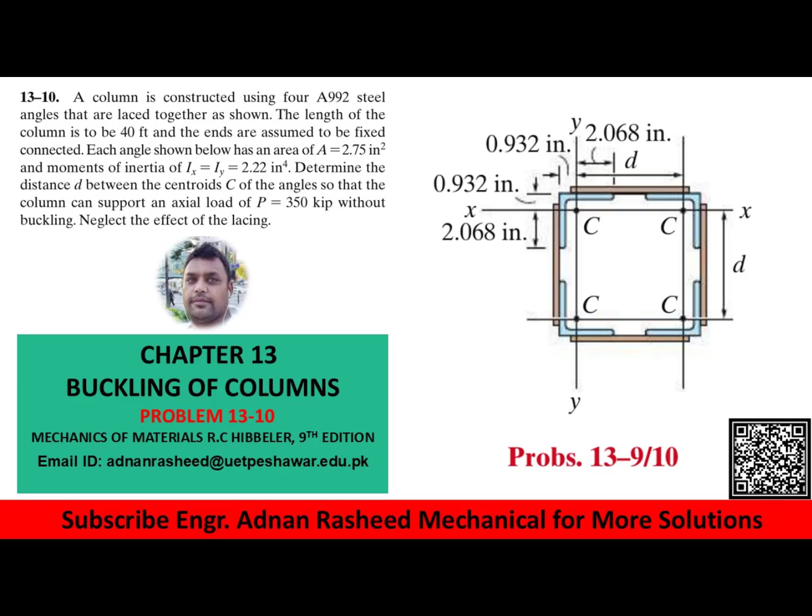Welcome back. In this video, we are going to solve problem 13-10 from chapter 13, Buckling of Columns, from the book Mechanics of Materials by R.C. Hibbeler, 9th edition. The statement is: a column is constructed using four A992 steel angles that are laced together as shown.

The length of the column is 40 feet and the ends are assumed to be fixed connected. Each angle shown has an area of 2.75 square inches and moment of inertia Ix, Iy of 2.22 inch^4. Determine the distance d between the centroid C of the angles so that the column can support an axial load of 350 kips without buckling. Neglect the effect of lacing.

So these are the four angles that are laced together, and these are the lacings. The moment of inertia of each angle about its centroid, Ix and Iy, is given as 2.22, which are the same, with area 2.75 square inches. The column is assumed to be fixed connected. So you have to find this distance d between the centroids of these two angles. Let's start with the solution.

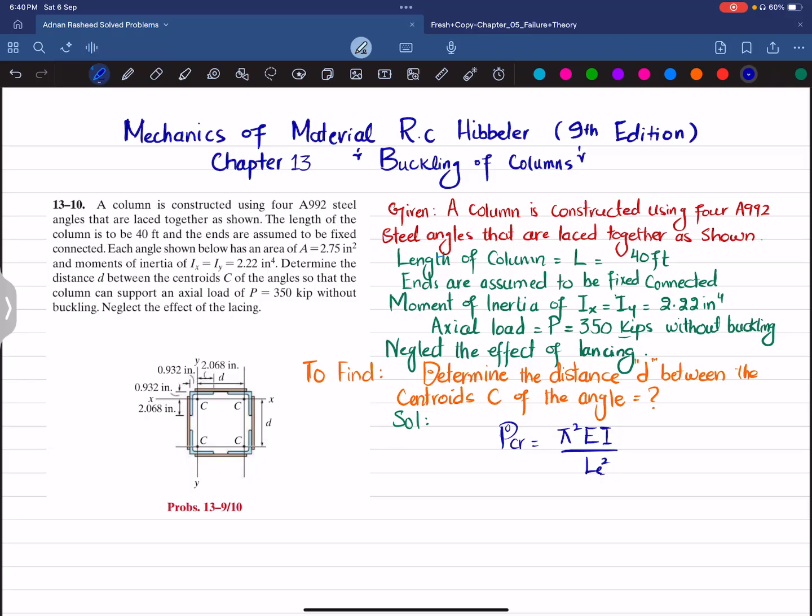What we are doing is using the fact that critical load equals pi squared EI divided by L squared. Critical load is the largest load, the largest load without buckling of the column. So this is equal to pi squared EI over LE squared. This is what we call the Euler formula.

Euler's formula is valid; we can apply this formula only when the critical stress is less than the yield stress. So how do we find critical stress? Critical stress equals critical load over area, and that should be less than yield stress.

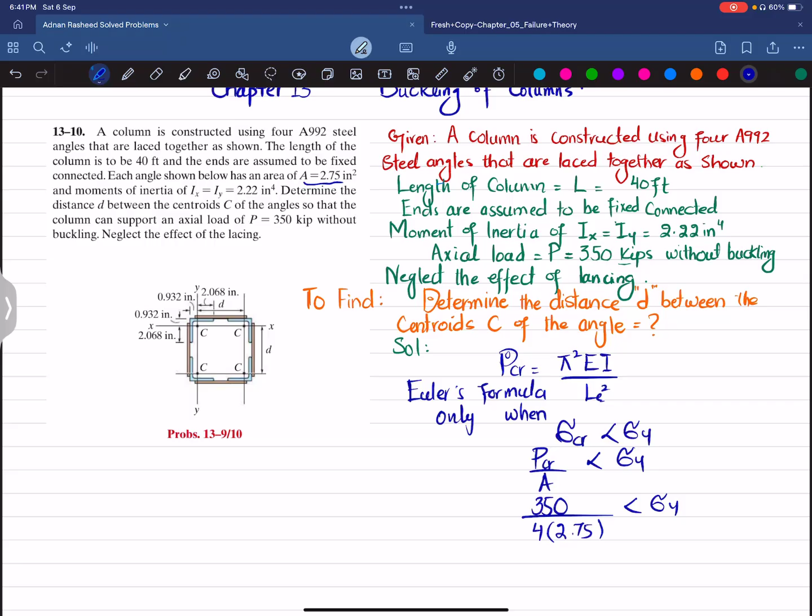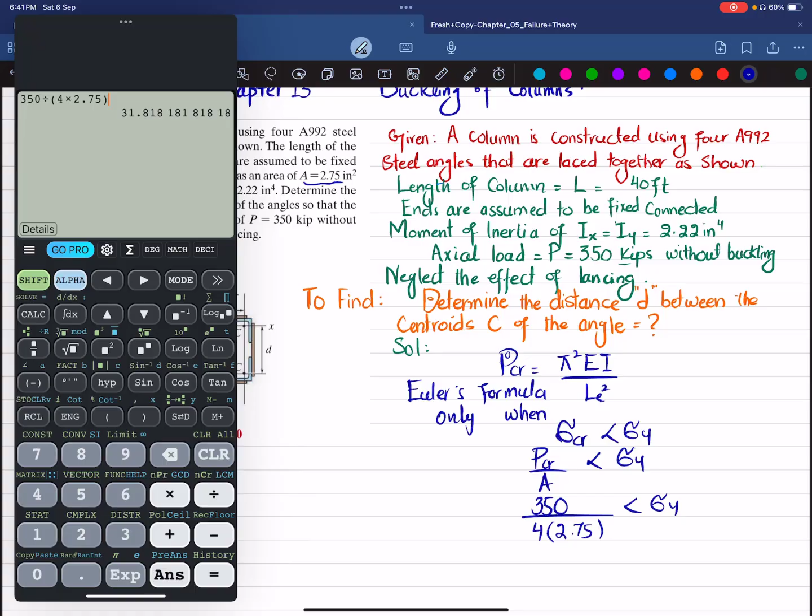Critical load, 350 kips without buckling, is given. So 350 divided by area. There are four angles, so 4 multiplied by the area of each angle, which is 2.75 square inches, should be less than yield stress. So 350 divided by 4 multiplied by 2.75 gives 31.81 KSI, and this should be less than the yield stress.

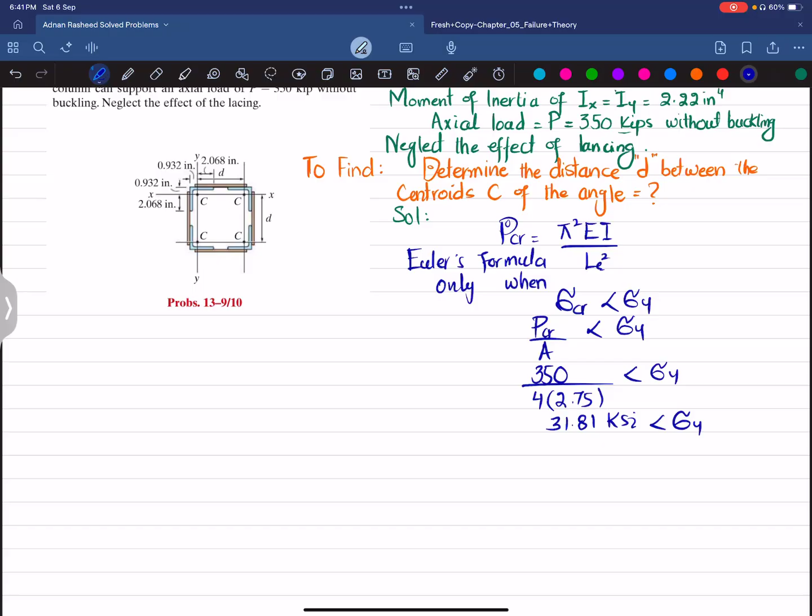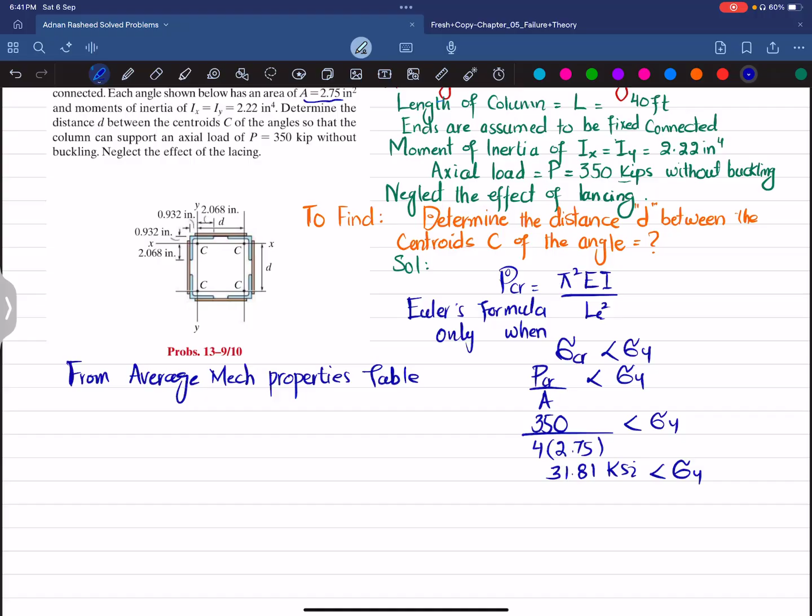So what is the yield stress for A992? We will go to the property table, the average mechanical properties table at the end of the appendix, where we will get sigma yield and also the modulus of elasticity. You have to go to the end of the book, the average mechanical properties table, and look for A992 steel, which has a yield stress of 50 KSI and modulus of elasticity of 29 times 10 raised to power 3 KSI.

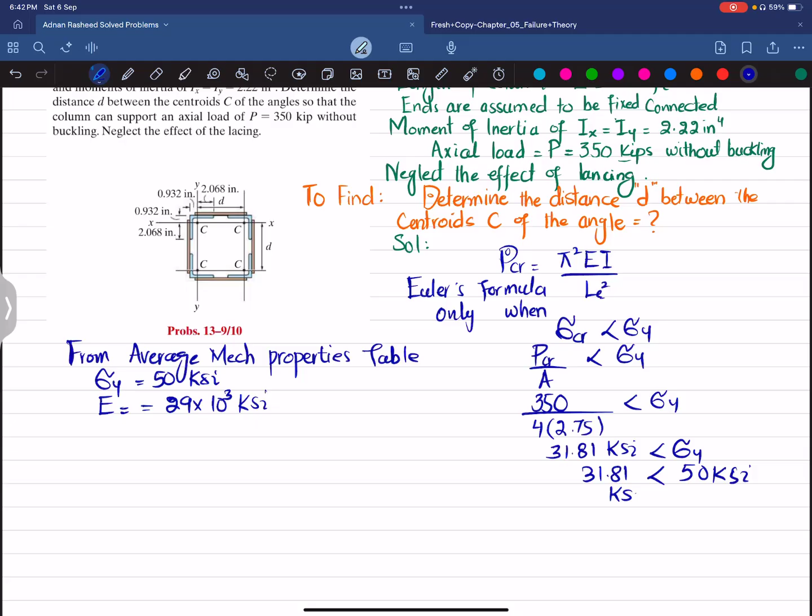Now you can see 31.81 is less than 50 KSI. So it means the Euler formula is valid, and we can apply this formula.

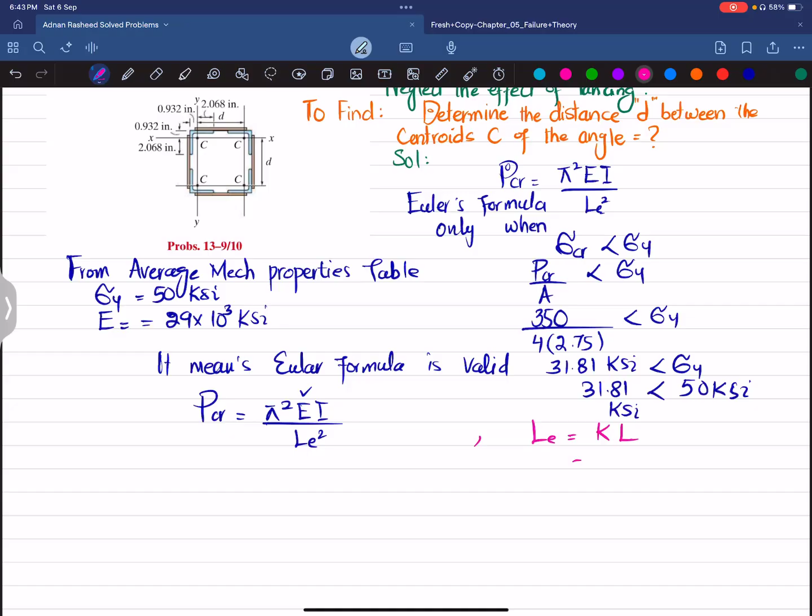Euler formula: P critical equals pi squared EI divided by LE squared. Now in this we have the E value, but we do not have I and LE. So what we are going to do is find LE, and we know that LE equals K times L. What is K? K is a factor, and it is given in the question that the ends are assumed to be fixed connected.

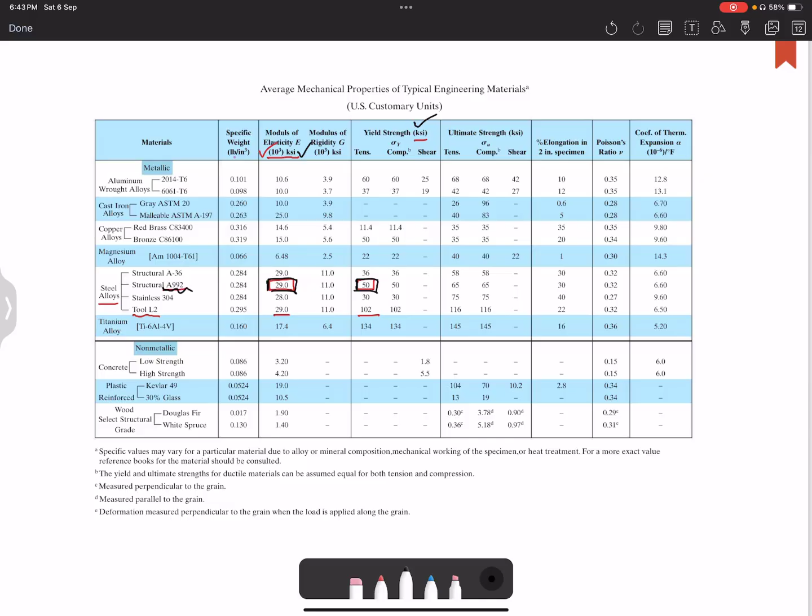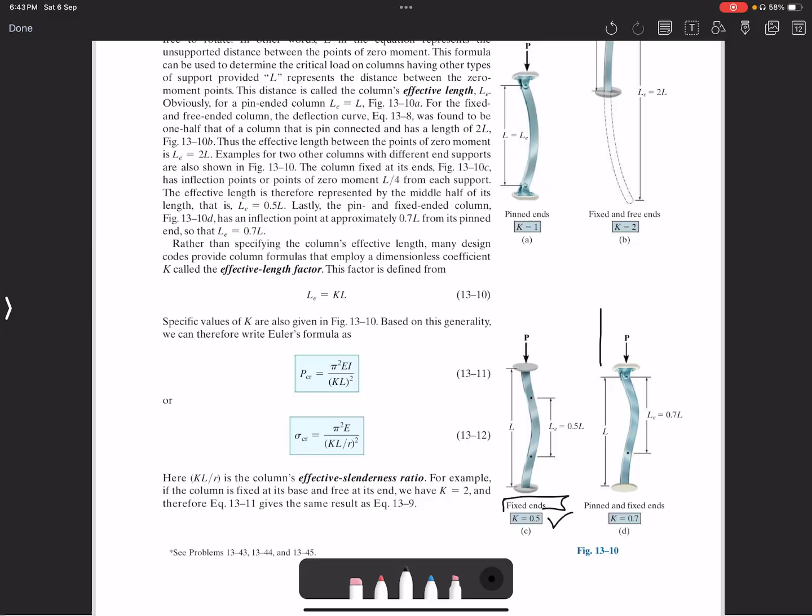So for that you have to go again to the book, and in chapter 13 you will get this value of K. Here you can see there are four cases. Our case is both ends fixed, so K is 0.5. So LE is equal to 0.5 L, where L length is given as 40 feet.

So 40 is converted into inches, since 1 foot equals 12 inches. So the effective length will be this value. Now what about the moment of inertia I? So I will write I.

We know that if you take the horizontal line at the mid of this whole section, and similarly a vertical line passing through the mid of the whole section, you will get this point O. So this is the centroid of this whole section, and you can see that each centroid of this angle is away from it.

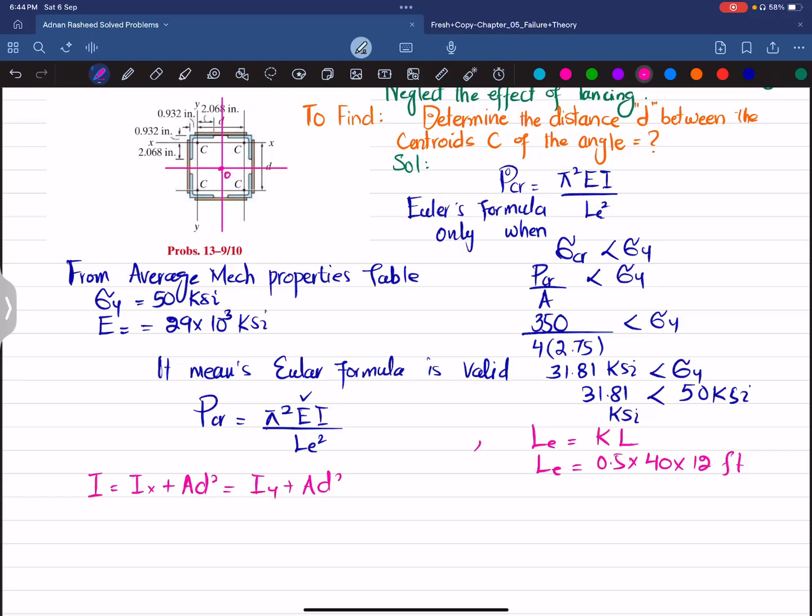So moment of inertia will be equal to either Ix plus A times d square, and is also equal to Iy plus A times d square, because it is symmetrical about the horizontal as well as the vertical axis. So you can take any one of these.

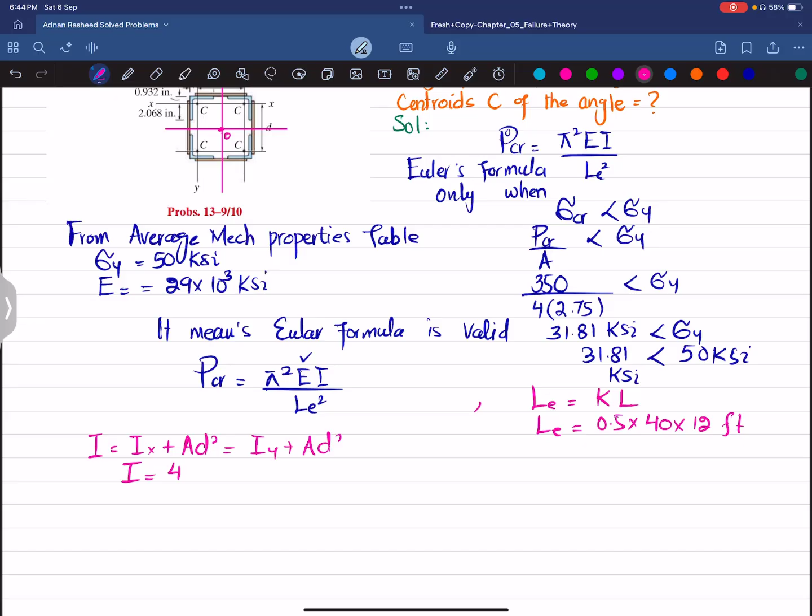So I will take Ix is equal to, as there are four angles, 4 multiplied by Ix, which is given as 2.22. So 2.22 plus area, which is 2.75 square inch.

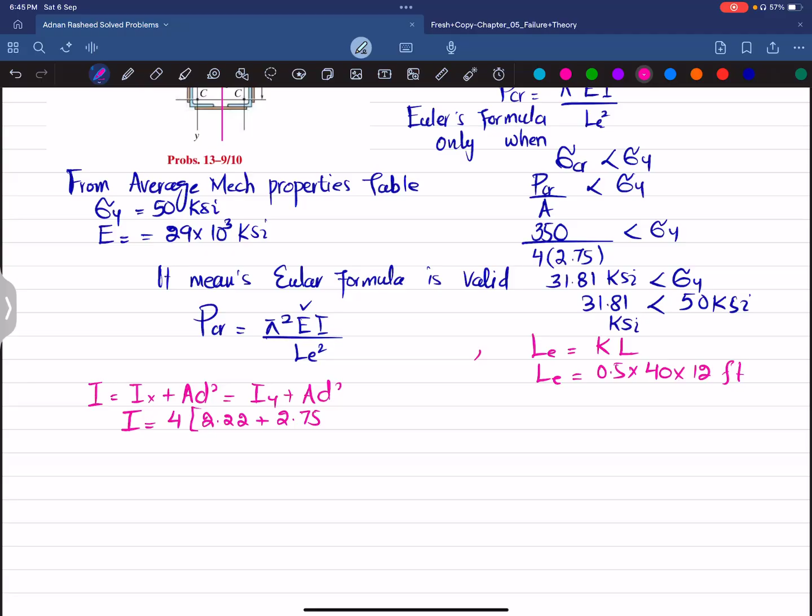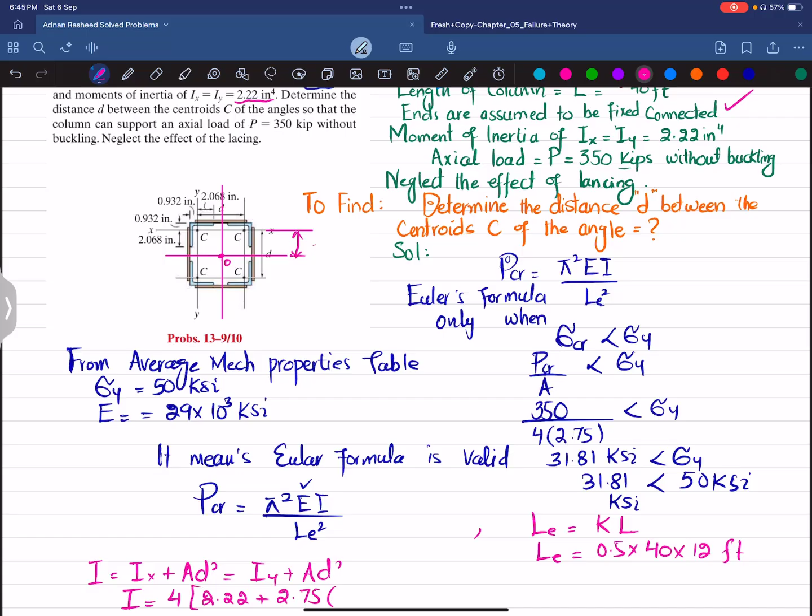And what is d square? So d square is the distance from this neutral axis till the centroid of this section. This is distance d, and you can see this whole is kept as small d, so this will be equal to d divided by 2. So I can write d divided by 2 whole square.

Now, if you multiply 4 with 2.22, that is 8.88 plus 4 multiplied by 2.75 into this term will give you 2.75 d square. Now you have all the values, just plug it into this formula.

So we know that P critical is equal to pi square E, where E is 29 into 10 raised to power 3, and I is 8.88 plus 2.75 d square, divided by LE square. So LE is 0.5 multiplied by 40 multiplied by 12, whole square.

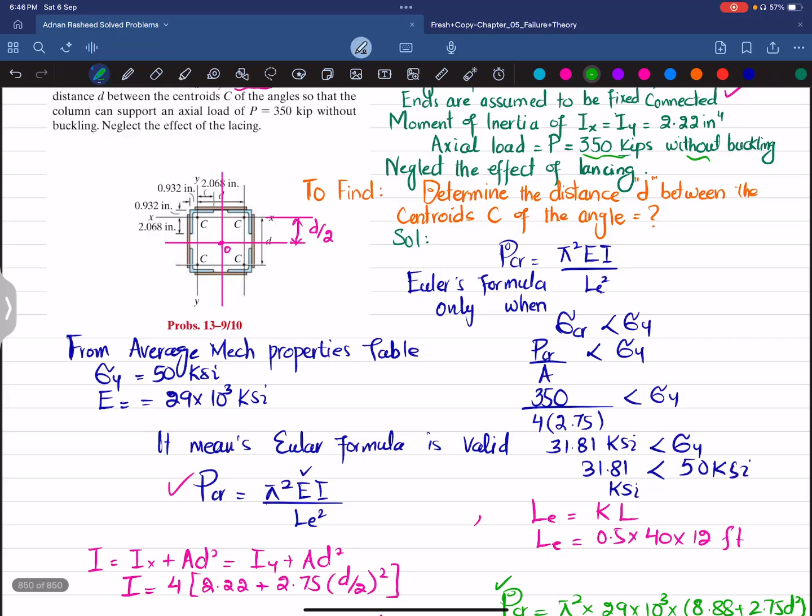And we know that critical load is the maximum axial load that can be used without buckling, and that is given as 350 kip. So 350 is equal to pi square multiplied by 29 into 10 raised to power 3, multiplied by 8.88 plus 2.75 d square, divided by this LE square, which is 0.5 multiplied by 40 multiplied by 12.

Now we need this d square term, so I can write this as 350 multiplied by 0.5 multiplied by 40 multiplied by 12 whole square, divided by pi square multiplied by 29 into 10 raised to power 3, is equal to 8.88 plus 2.75 d square.

So if you calculate this term, 350 multiplied by 0.5 multiplied by 40 multiplied by 12 square, divided by pi square, which is this value, multiplied by 29 multiplied by 1000, that is equal to this.

70.43 is equal to 8.88 plus 2.75 d square. So 2.75 d square will be equal to 70.43 minus 8.88, which is 61.55. So that is 2.75 d square.

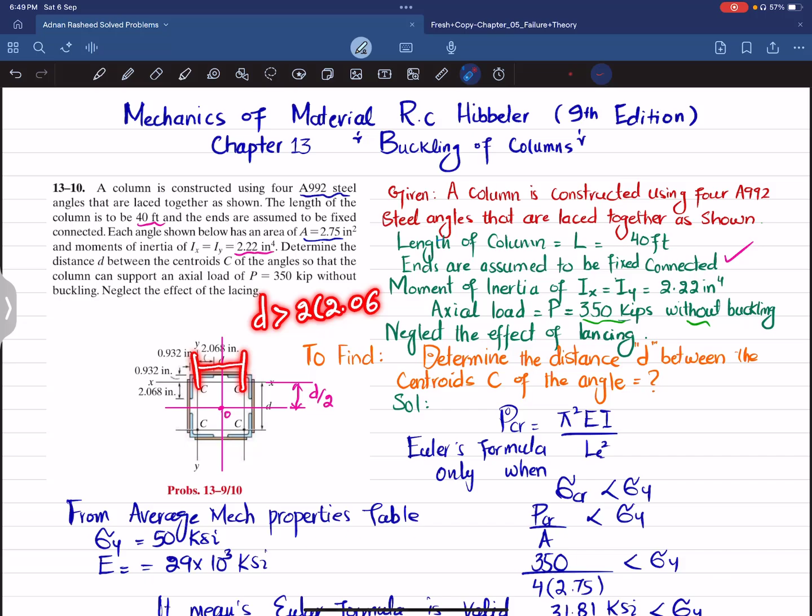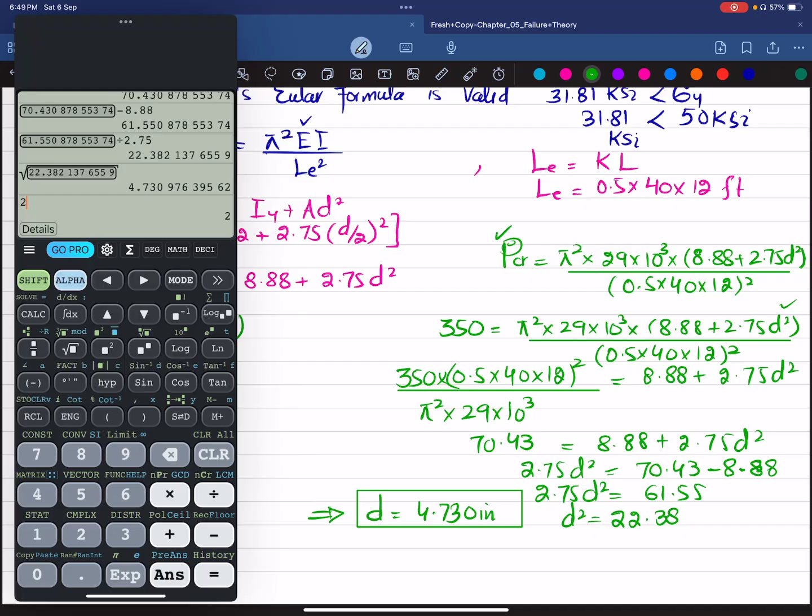So your D should be greater than 2 multiplied by 2.068. Let's check. Your D should be greater than 2 multiplied by 2.068. So 2 multiplied by 2.068 is 4.136.

And your D is 4.730 inch, so it means that this answer is okay. So D, the distance between center to center of angle, is 4.730. You can take either this one or this one, you have to maintain this distance. D is 4.730 in order to support this load without buckling.

And that was all about this problem 13-10. I hope you have enjoyed this video and you have learned from it.